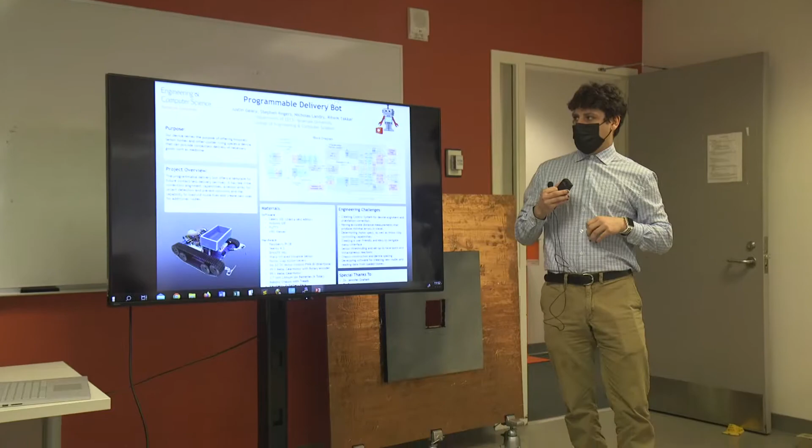I'm Stephen, that's Justin. Nick and Ricky are both online. They're both virtual. We made a programmable delivery bot. Our team is the lawnmowers, and clearly that is not a lawnmower, so different basis now. So I'll let Ricky discuss the purpose, and then Nick will go into the overview and materials.

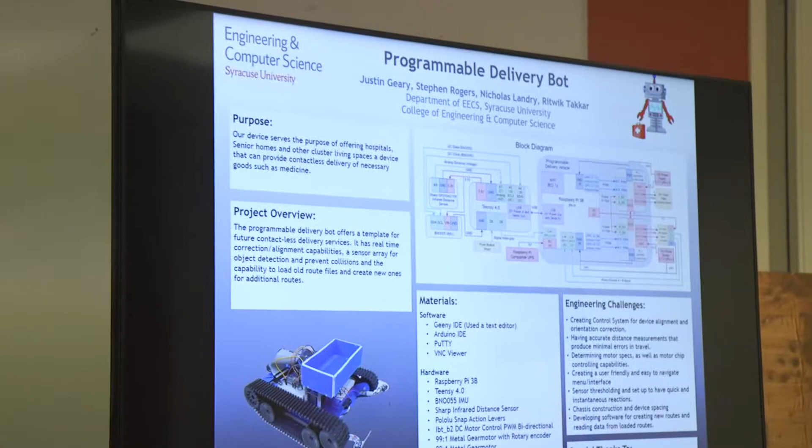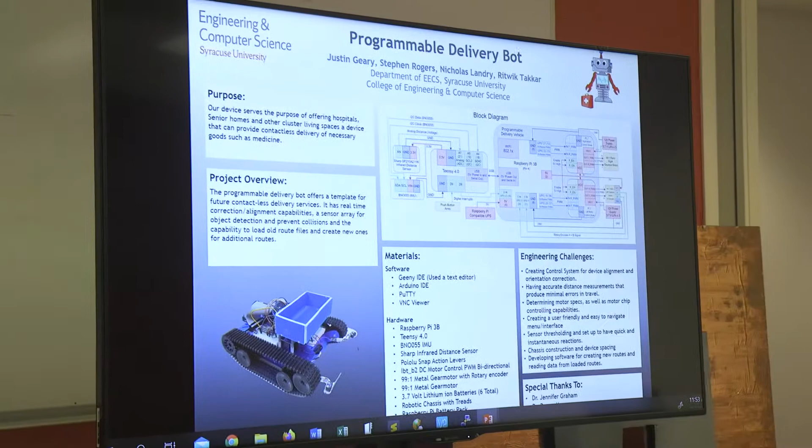Sure. So the purpose is that the recent pandemic has not made life easier for those who care about transmission of disease, especially resulting from delivery services. Our project intends to serve the purpose of offering hospitals, senior homes, and other cluster living spaces the provision of robust, contactless, and autonomous delivery. The recent global pandemic has only reinforced the necessity of minimizing contact touchpoints during deliveries as soon as possible. And now to discuss our project overview and materials, Nick's going to take over.

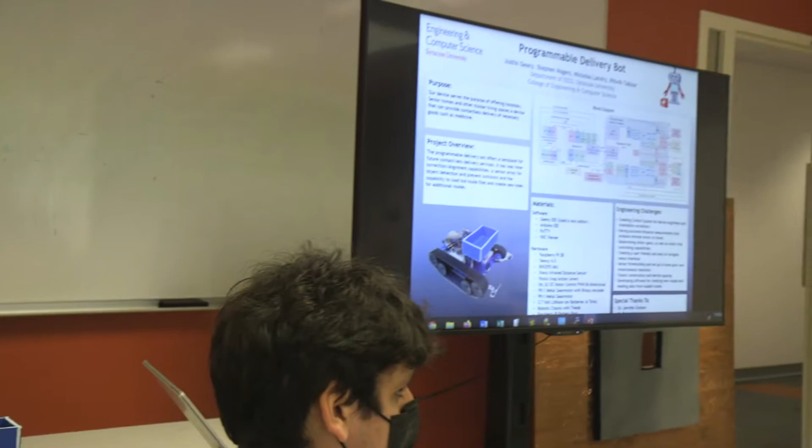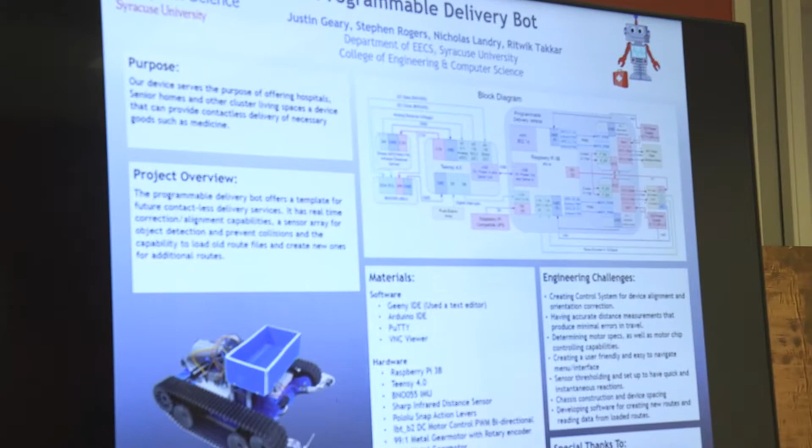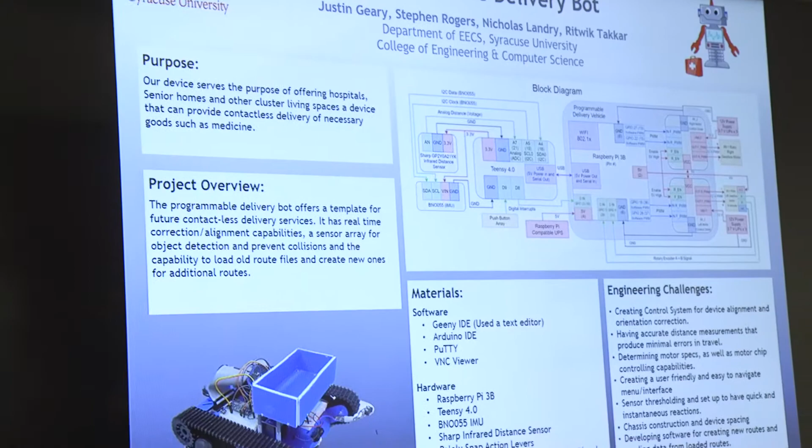All right, so our delivery robot basically offers a template for future robots that would be able to perform contactless delivery services, whether it's food delivery, medication delivery, and so on. And it comes equipped with real-time path correction and alignment, a sensor array for object detection, collision prevention using snap action levers, and the capability to load pre-existing route files that are saved onto the robot and create new and additional routes. And so we have a list of materials which includes both software and hardware components.

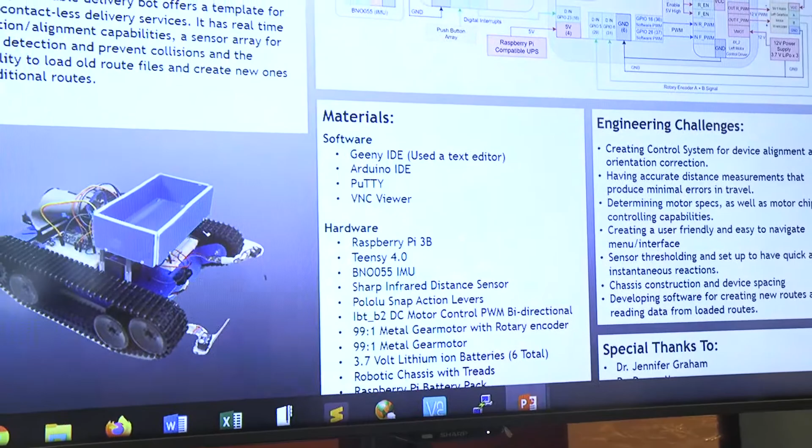For our software, we use the Geany and Arduino IDEs as our code editors. We used PuTTY as our SSH client so that the Raspberry Pi terminal can be accessed from another computer on the same network. And VNC Viewer as a remote access application so that our remote team members can access the Raspberry Pi from their own computers.

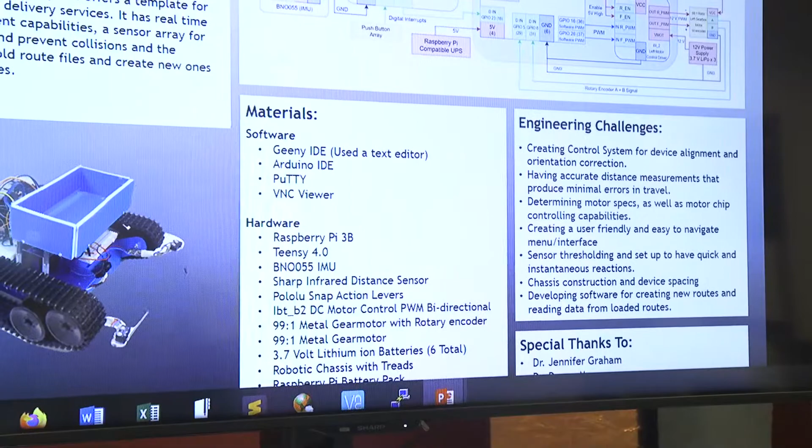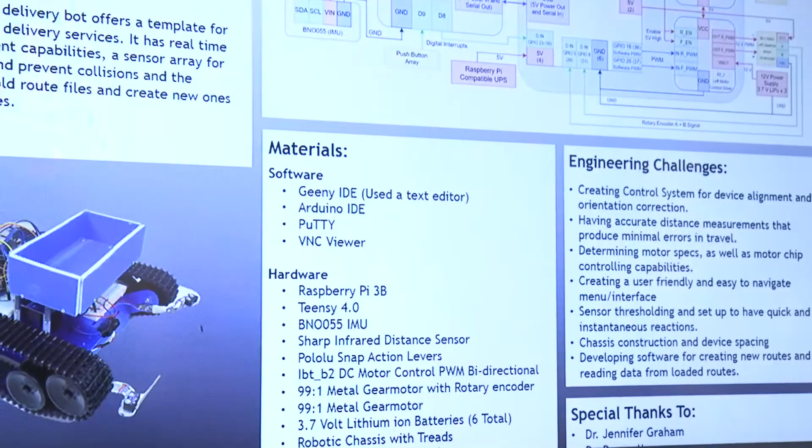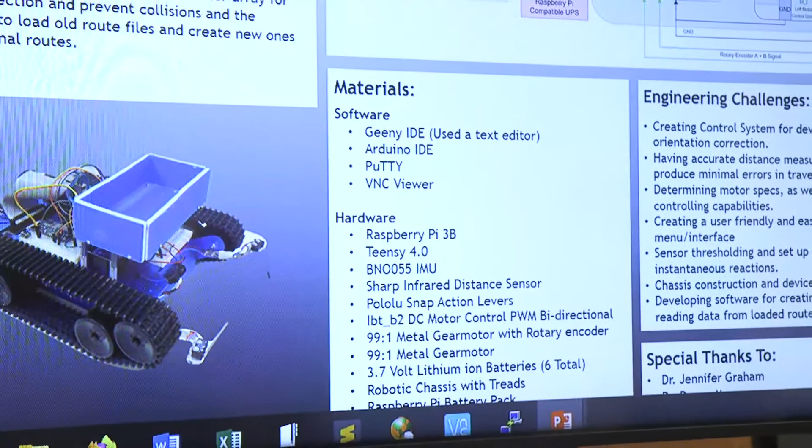And as for the hardware, we had a Raspberry Pi 3B, a Teensy 4.0, and we had our infrared distance sensors and Pololu snap action levers, which work together as our collision prevention, an Ibt_b2 DC motor controller, and 99-to-1 metal gear motors. And only one of these gear motors had a rotary encoder, since it didn't really make sense for both of them to be sending distance data to the Raspberry Pi.

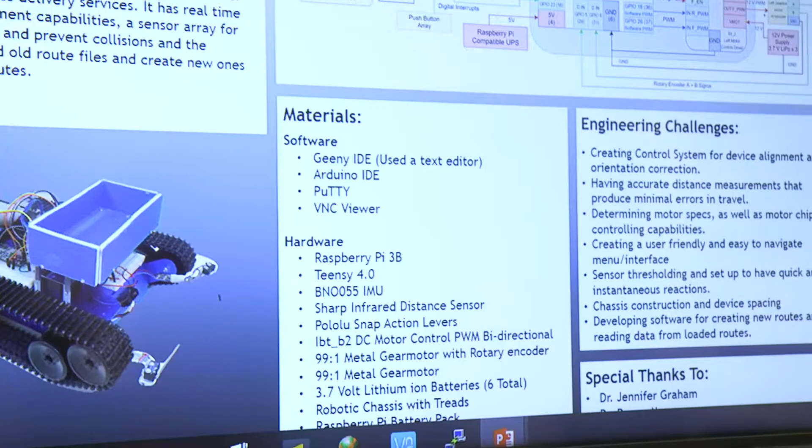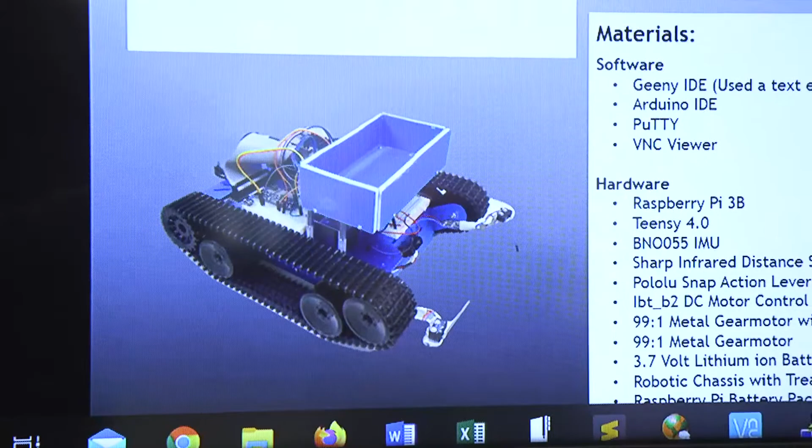And then we had 6 rechargeable 3.7 volt lithium ion batteries and a Raspberry Pi battery pack. And all of these were mounted onto our chassis, which came equipped with treads. We decided to have treads so that the robot could better handle bumps in the terrain or any unevenness in the floors. And now I'm going to be handing it off to Stephen. Well, actually, we'll go to Justin and talk about the block diagram first.

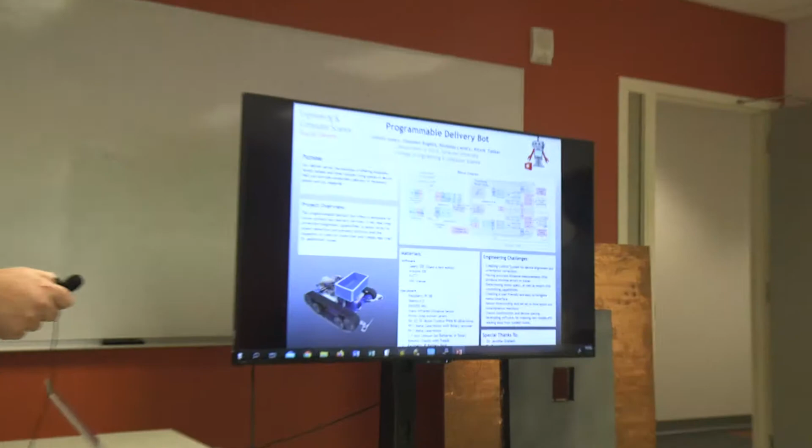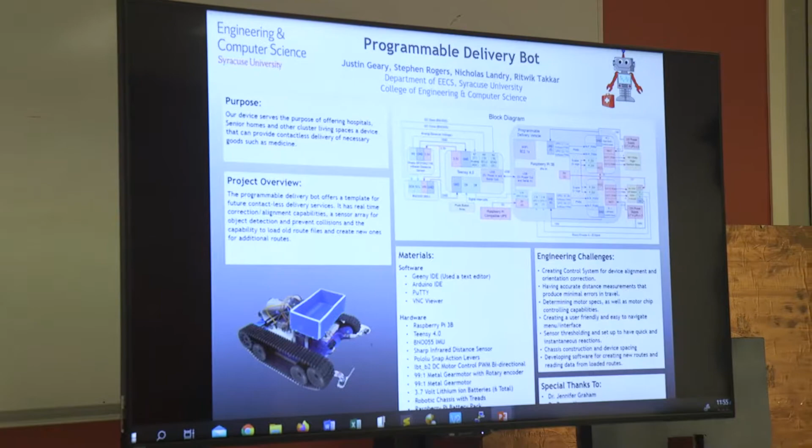Okay. I'm not sure how well the block diagram is visible, but basically the system is run by a Raspberry Pi 3B. So the Raspberry Pi controls the GPIO functions that control PWMs to the motor control drivers for both of the motors. Since the motors required higher current, we had to update them to different motor drivers, and we needed a total of 4 PWMs to control each. They were a little bit undesirable, but it's what we got at the time to make it functional.

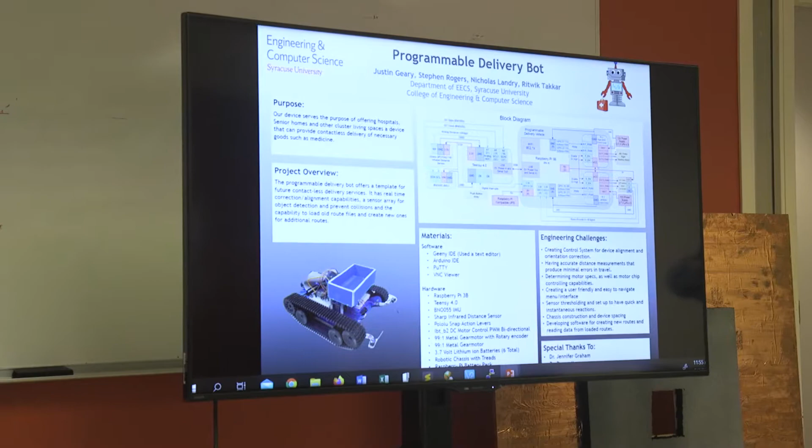So they work in tandem where each motor for a reverse and forward function takes 2 separate PWMs. You just can't have both sending at the same time. So you turn one on and one off in order to drive the motor in the forward or reverse directions, which are sending through somewhere around 1.5 to 2 amps worth of current, which is one of the reasons we had to go to a much higher voltage motor control driver. So the GPIOs are controlled on the Raspberry Pi, and we're running that through a C or C++ program that was written to maintain and control GPIO functionality.

In order to drive the vehicle forward, we also capture rotary encoders on one of the motors, which gives us counts and distances to a relatively accurate threshold. We found that it could get accurate distances up to about plus or minus 0.1 inches. So over longer distances, that would end up being a little bit of an issue, but for testing purposes, it wasn't. The main functionality of it, though, is our controls sensor for the forward driving function.

The forward driving function utilizes a BNO, which is connected to a Teensy 4.0. So the BNO is going to capture real-time yaw angle data on the x-axis. And when the program itself is turned on, it's going to capture an initial reference point for a north heading, and it'll create cardinal directions for east, west, and south that it will retain throughout the function of the program. So if the vehicle were to rotate in position, it would have new set points for its new headings. So as the vehicle would drive forward, it would utilize the control settings.

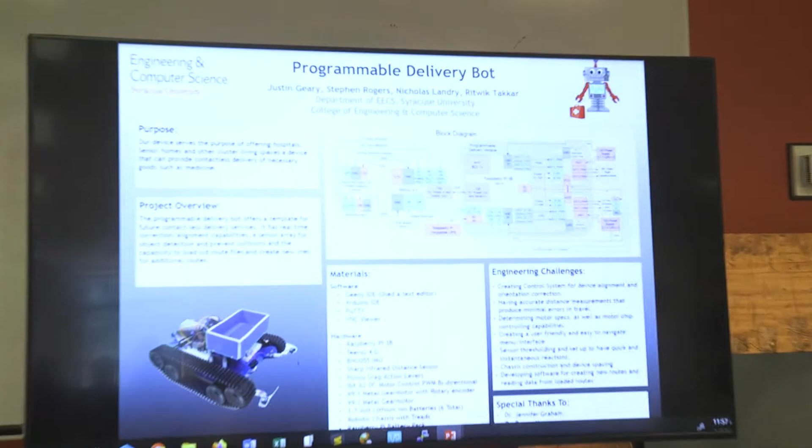We implemented a PID controller to keep it to the set point angle, and it works relatively well. A lot of the issues and constraints with it not functioning as quickly as we want have to do with the motors and the chassis and the tightness of the tracks itself.

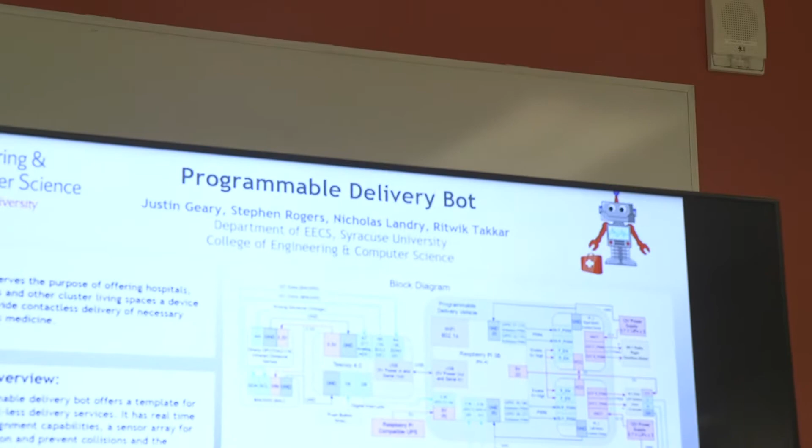Also connected to the Teensy 4.0, we have a sensor array, which includes 2 push-button sensors for interrupts to detect objects that are physical and are easily missed by the infrared sensor, and the infrared sensor itself, which can detect objects up to about 2 feet in distance, which will suspend the program if objects are detected and wait for the object to be removed in order to continue running itself.

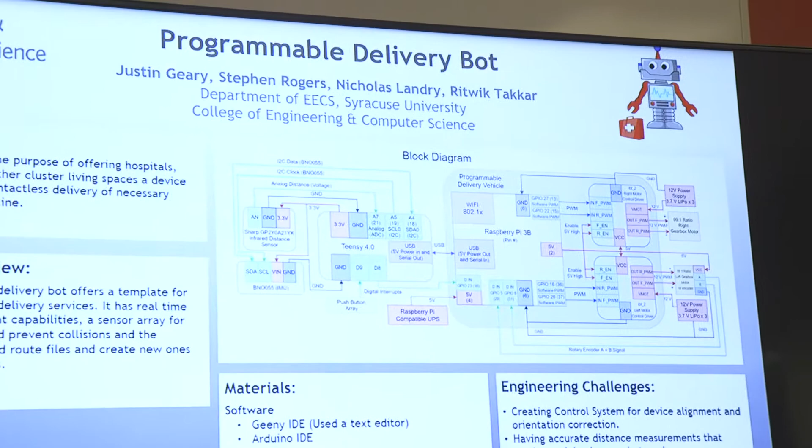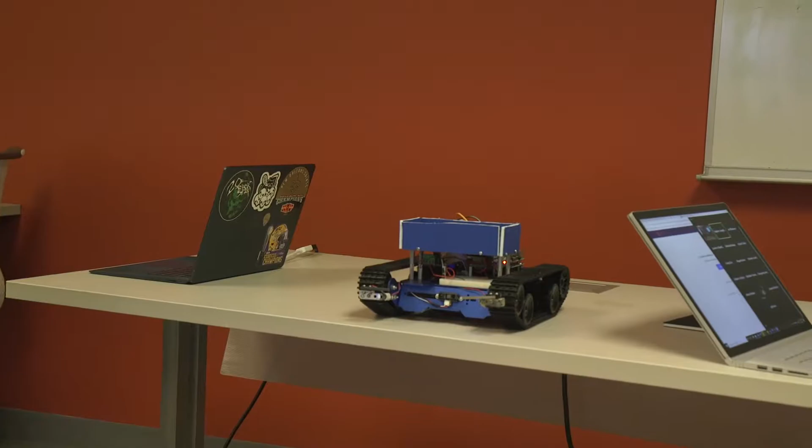And the main issue we had with the infrared sensor was that it was analog, and the Raspberry Pi doesn't contain onboard analog to digital converters, so we opted to run a separate microcontroller just for sensor input and use digital interrupts on the Raspberry Pi to control the interrupts that would happen if objects were detected.

So I'll discuss some of the engineering challenges that we faced during this project. One is back at the beginning of the semester when we first started this device, we didn't really figure that with any given floor, the slightest little jolt or ridge is gonna throw the whole device off, and then you go 10 feet, you're gonna be off 3 feet to the left because of one small interference you had.

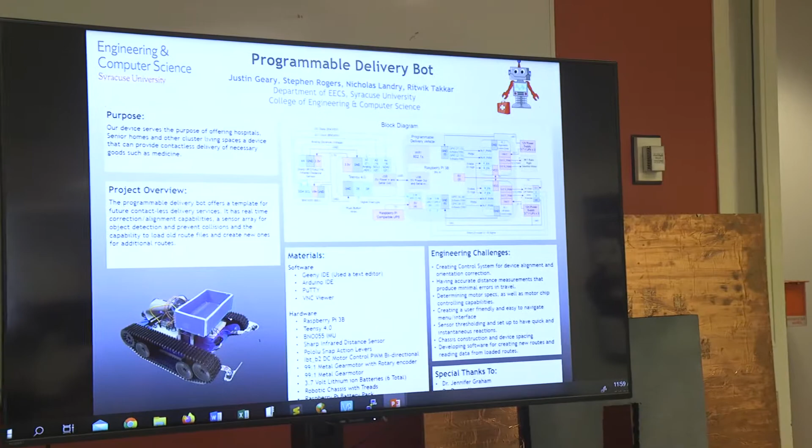So the main thing we implemented on this was the control system, as Justin talked about. This helps it stay nice and aligned, so you can bump it off its axis, but it's still gonna find that center point and keep going forward.

Another thing was accurate distance measurements. So we spent a lot of time looking at the rotary encoder and how many counts translated to how many feet it would go forward. If I remember properly, it's around 2,050 counts that the device is going to take to go 1 foot with the rotary encoder data.

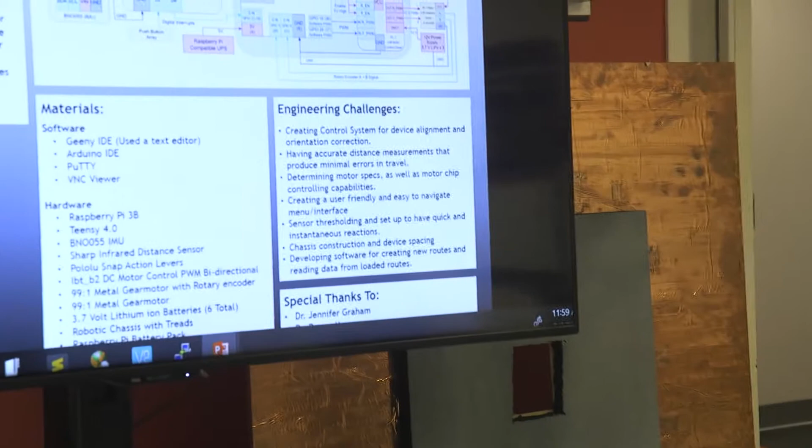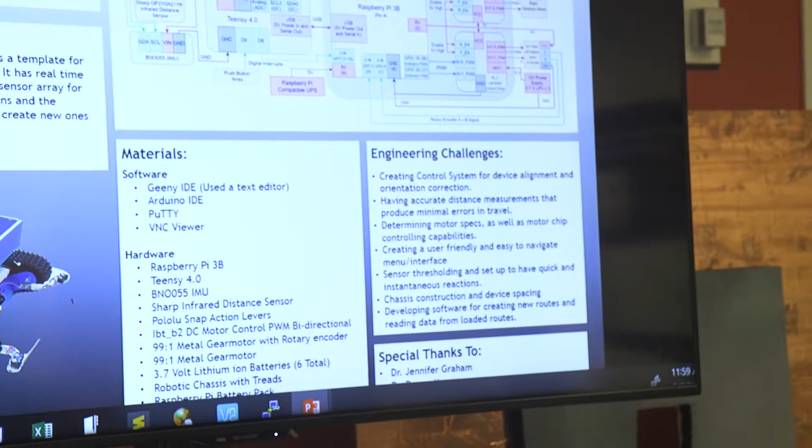Another thing is the motor specs. There's a lot that goes into picking those motors, because before we had this device, we didn't know how tensioned those tracks were going to be. So we just bought 6-volt motors, and that did not suffice at all. Couldn't even move it. So we had a few problems there. We had to buy higher voltage motors in order to power that device.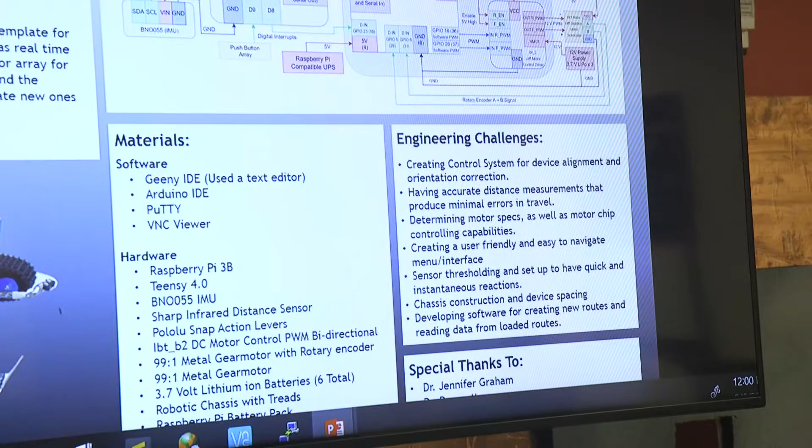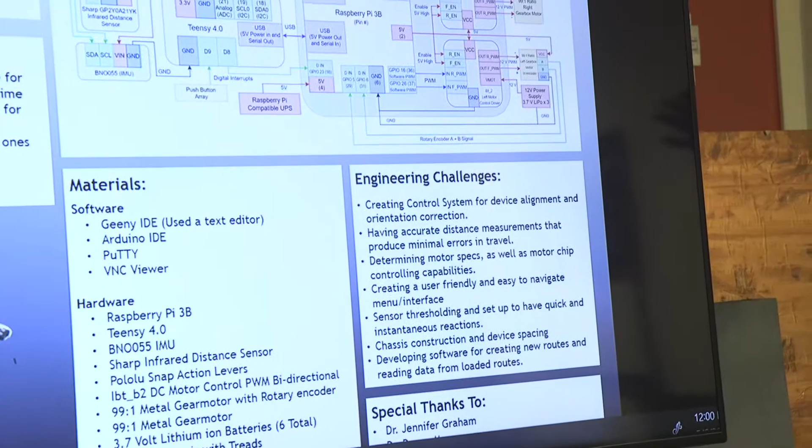We also needed a user-friendly menu, because all of us in this room could probably navigate a program pretty well, but this device is going to be used just about anywhere. You're not going to have someone in a senior home knowing how to operate software very well. So Justin implemented a very user-friendly menu. It's going to make it really easy for anybody to pick up the device, create a route, load an old one, exit.

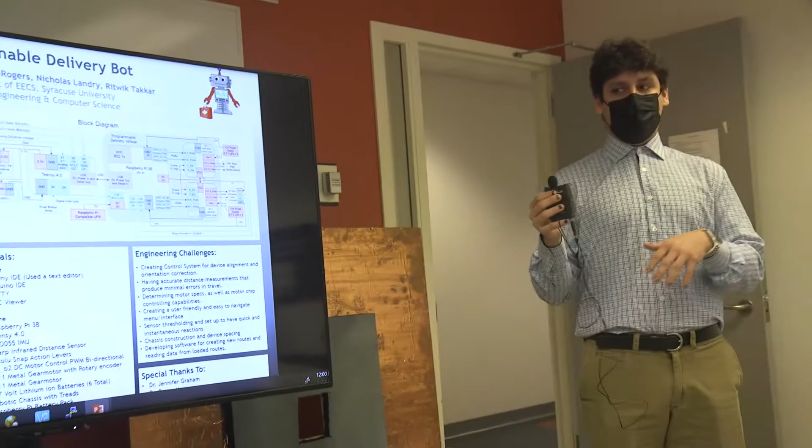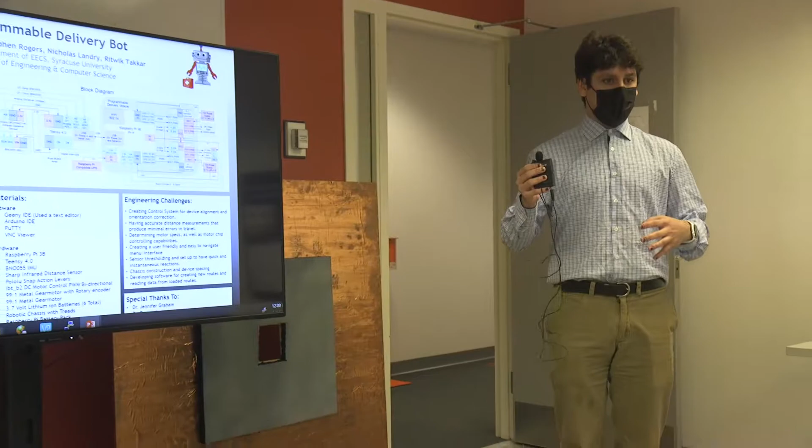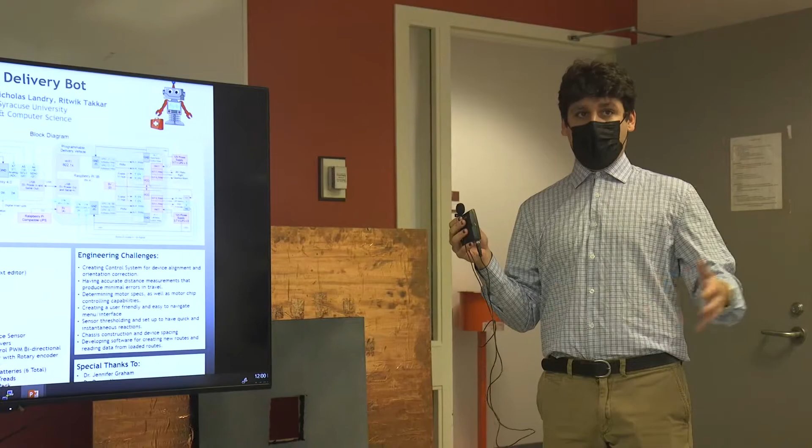Another thing we had was sensor thresholding. We weren't quite sure how far we wanted it to stop, or how close someone wanted to be. Then there's also the thought where if someone steps in front of it, the sensor might stop it, but if it just keeps going when you lift your foot back up, it's likely going to catch up to you if you're walking very slow or with a cane. So we needed that interrupt where it waited a second and then continued the device on its path.

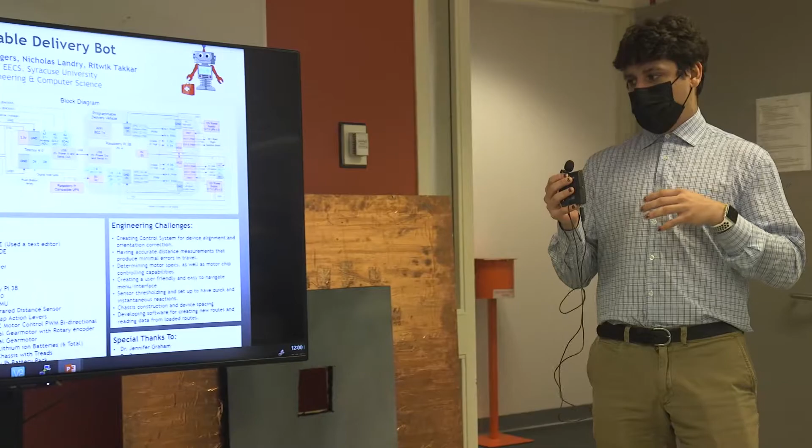And one other thing is we had to deal with this chassis, which has been, for lack of better words, an utter disaster, because we're not mechanicals. There's a lot that goes into these design aspects that we weren't really aware of before we picked it up. Granted, this device still works to its full functionality, but there's a lot we needed to consider mechanically that we didn't perceive in the beginning. We thought we'd just make a device and get going, but that's not how it goes. A lot had to go into that chassis to make it fully functional.

And the last thing, we had to develop software for creating routes and also loading routes. We'll show later on in the demo exactly how it creates a new route, and when it's reading from that route, what data it's processing, and how the file is written when you make a new route or load one.

So I guess we can get into demoing this device. If you want to pull it up on your computer, Justin.

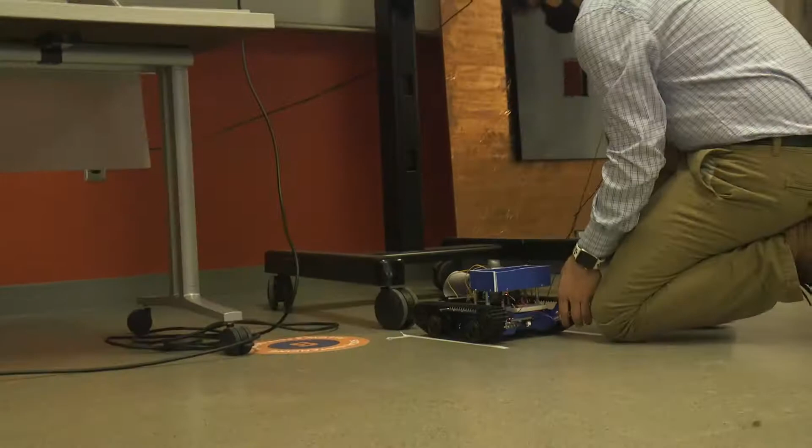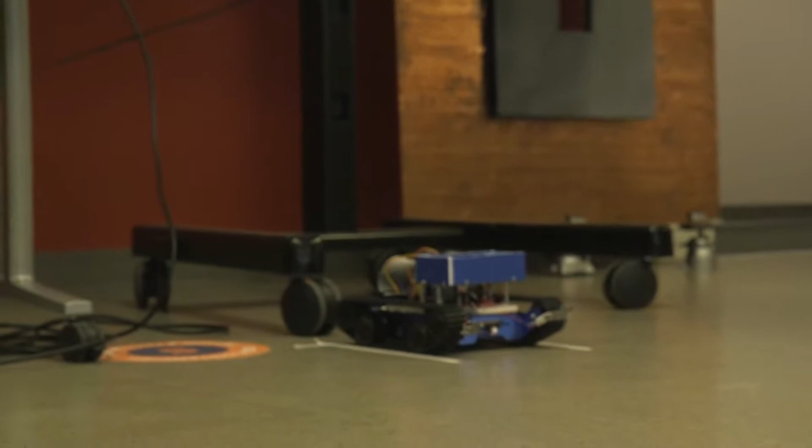So essentially, I've logged onto the Raspberry Pi over SSH, and we just run a simple demo program. So initially when it starts up, here you can see that it's using the BNO and it grabs the north heading for the angle on the axis, and then it creates cardinal directions of reference points. Because when it's going to rotate, it's not going to use any kind of control systems to get an accurate rotation. Rotations end up with like a plus or minus 2 to 3 degree error. So the idea is that when it starts driving forward again, it has a set point already and it'll just correct itself as it drives forward.

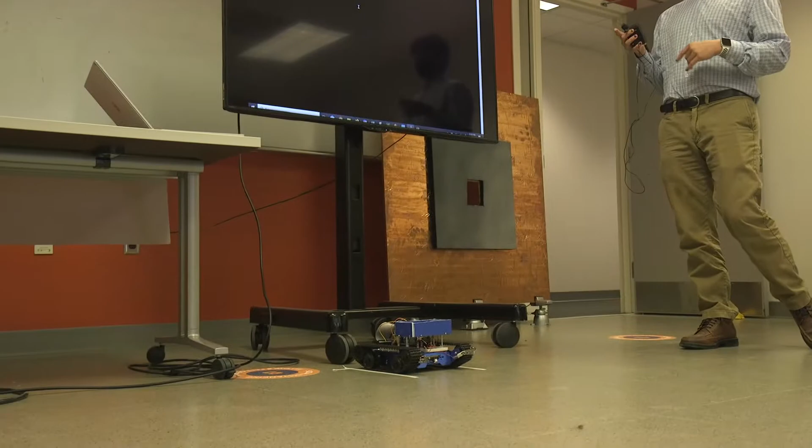So we'll jump right into the main menu in here. Yeah. So let me just get this. So originally what our plan was is we were going to demo in that room. So we had all these routes programmed, but seeing as you can't fit 30 people into that small room, it's a little bit different now. But when we open our menu, you'll see that there's like 4 rooms per se. But for this case, we're just going to show off it going from room 1 to room 2 and then back to home.

Originally, it had 4 different routes, 4 different rooms. You could go to any different room from any set point. So if you're at room 2, you can go home. You can go to room 3. You can go to room 4. You can go to room 1. Doesn't really matter. One good detail with this too that we implemented was with this whole demo, you can't kill this program until you're home. Because you don't want this device getting up to some door and then someone quitting the whole program and then having this device just sitting at the front door. So you can only quit this whole demo once it actually gets back home. So that's another good thing.

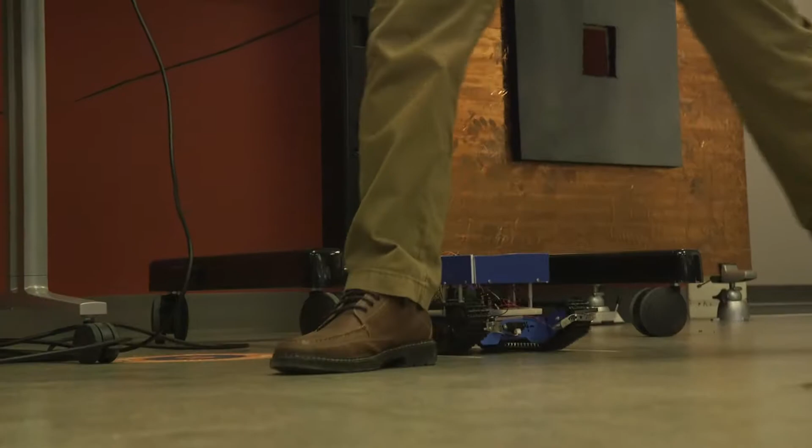So here, we opted out of using the longer length rooms because it's really slow. And if we had it driving to one of the further away rooms, it could take almost like 2, 3, 4 minutes just to get there. So for the demo's sake, we'll start the PDV demo, and it has a selection here. It says that we're currently in the home location, and we can move to any one of the 4 rooms, and we'll move directly to room 1. And the vehicle, we designated the tape strip here to be room 1, and that strip there should be room 2.

And just to exhibit the sensors work, if you stand in front of it, it stops, wait a second, it'll go again. You hit this bumper, it'll stop, it'll go again. And I don't know if you guys can see it, but it was slightly off when it turned, and then it recorrected itself to go back to this room, because it just takes those cardinal angles that Justin talked about. Oh, it's detecting. The infrared might detect your camera.

Okay. So one thing you can see here is that Justin implemented a part of the program where when an object's detected, this is going to tell you. So if someone's in a room and they just sent the device out and they have this whole module open, they're going to see that an object's detected and it hasn't said object removed, and they can go out and be like, oh, this device has been standing still for the past few minutes. Let me go check to make sure that there's nothing in the way of it, and let me go move something if there's a box or something. So that's just another good touch.

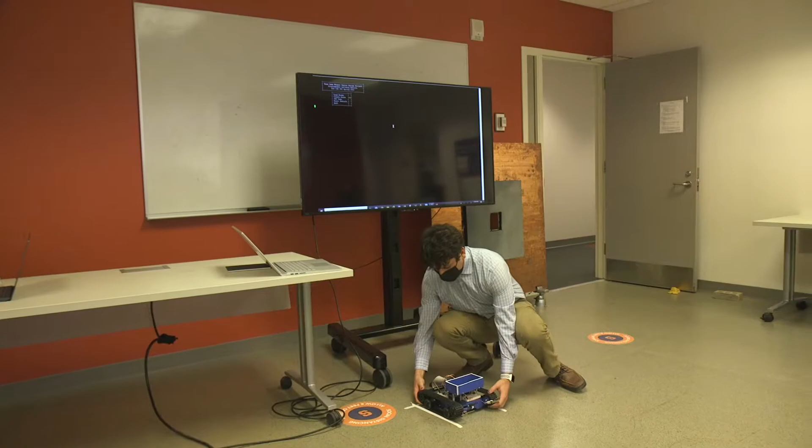So we also figured that it'd kind of be useless if me and Justin showed you how to create the menu, because the whole point of this is that Justin's menu is pretty easy to use. So if someone wants to come up and try to create a route themselves, feel free. Does anyone want to volunteer? I don't really think anything can go wrong, but you never know. Over there. Hey, so you just do create route. Here, you just hit enter.

Everything functions off of arrow keys and enter unless it specifies. In this case, they'll have you enter a file name for a text file. You can name it whatever you'd like. Our save file folder should be empty at the moment. Route 1. Enter. And then it will give you a selection of commands. So you can go forward, you can enter distance in feet, and it'll ask you if you want to enter more actions. Do you want me to do more than one?

Yeah, I guess do a right and then select another one, and then maybe forward 5 feet, so it's not too far and we're not waiting too long for it to drive around. And now if you hit no for another selection, it's going to ask you if you want to create a reverse route. If you hit yes, it will create 2 text files, one for the original route, and one to send it back home from wherever it is. Enter and continue. Wow, that was very easy.

Thanks, Nick. So if we go to the load route function now, the only thing present in there are the text files that are considered routes. So it's dynamic. As he adds more routes, it'll expand and you'll see more files. It's just reading a simple directory. As you can see, he has the route 1 text that he created there. So if we run that, the vehicle will do exactly as he specified. It should go 10 feet, turn right, go 5 feet, and stop. And if I run the reverse text file that was created for it, it should send it right back to where it was.